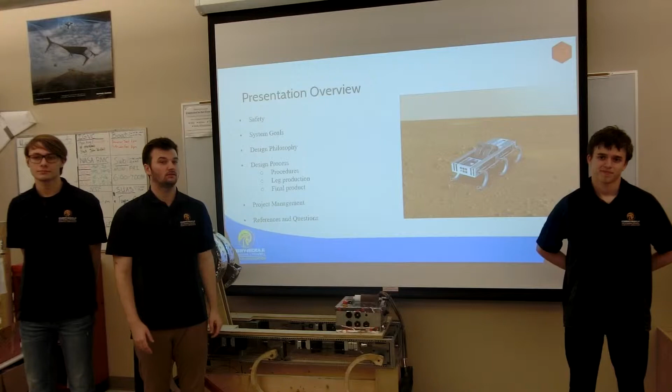My name is Zachary Marion, and I'm this year's team lead at Embry-Riddle Aeronautical University. In this presentation, we'll go over the safety, the system goals, design philosophy, design process, and team management. I'm going to go ahead and start it off with next year's team lead.

Thank you, Zach. My name is Nathan Rose. I'm the team lead for this upcoming year. The first thing we're going to be addressing is safety.

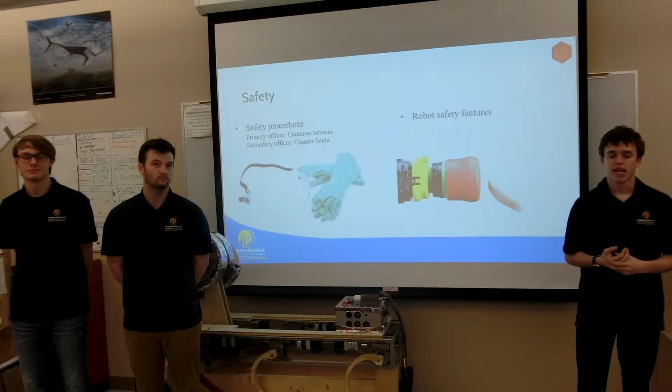We have two safety officers, Connor Scala and Cameron Severin, and during any test we require that two safety personnel be present: one that will watch the robot and one that watches everyone around to make sure that no one goes near the robot during a test.

Before a test is announced, we announce it to everyone in the room, and then we post signs in the area. That way everyone walking into the area will know that a test is in progress.

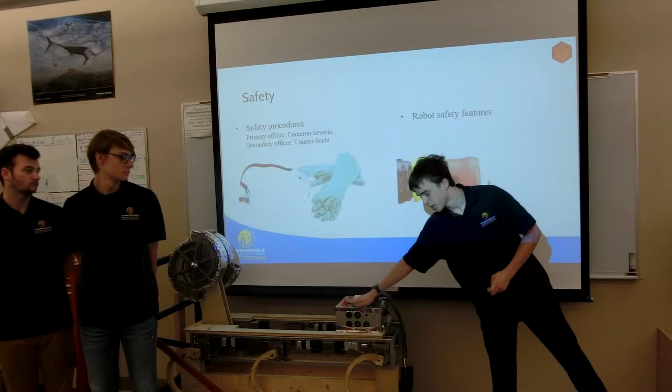Safety officers are in charge during a test, and everyone is required to listen to them. In addition, the safety officers are also in charge of the e-stop, and it is on top of our robot to help minimize injury during a test.

We also require that safety glasses are worn at all times during tests, and now I'm going to introduce the mechanical lead for next year.

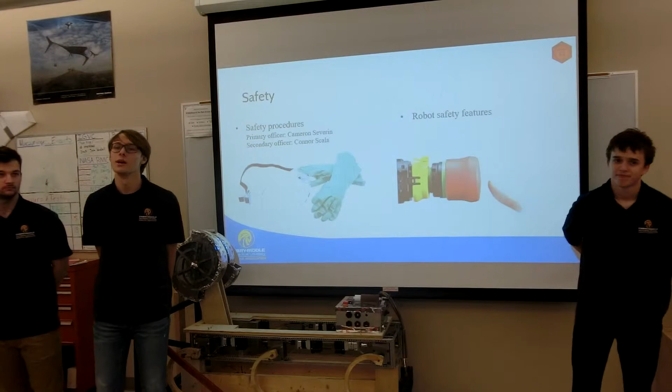Thank you, Nathan. My name is Roman Morozov, and I'm the upcoming mechanical lead. With our new Rex design, the goals of the system are to traverse through the obstacle field, mine in the designated zone, and return back to the depositing zone.

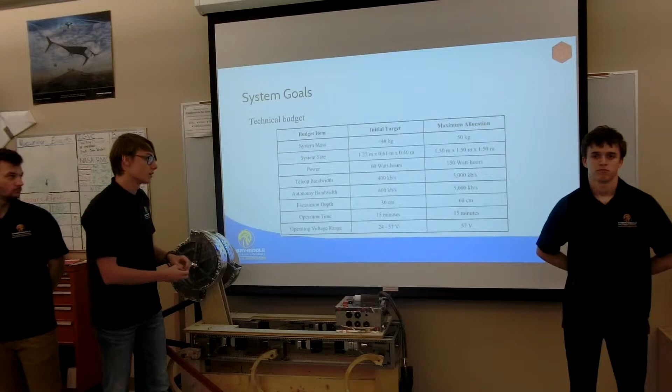We were allocated 50 kilograms for our whole system mass, but we are aiming to go under 40 kilograms. We were provided a certain volume; however, our final design for the robot is 1.25 meters by 0.61 and 0.4 meters.

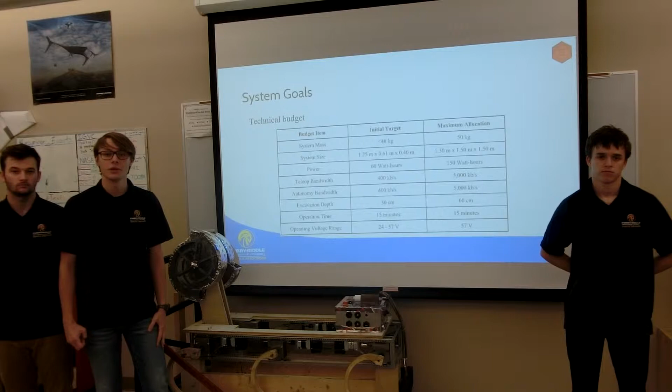Other items that we aimed for include 60 watt-hours of power, 400 kilobits per second of bandwidth, and an operating voltage range of 24 to 57 volts.

Our goals were improving from last year by minimizing the increase in mass of the whole system, implementing passive sifting, and designing the system for full autonomy.

Our robot must be safe, because safety is our number one priority. The system must mine at least 5 kilograms in the 10 minute run that was provided to us.

The robot must fit within the volume that is mentioned on the slide. The system must be dust resistant, robust, reliable, and capable of teleoperations and autonomy.

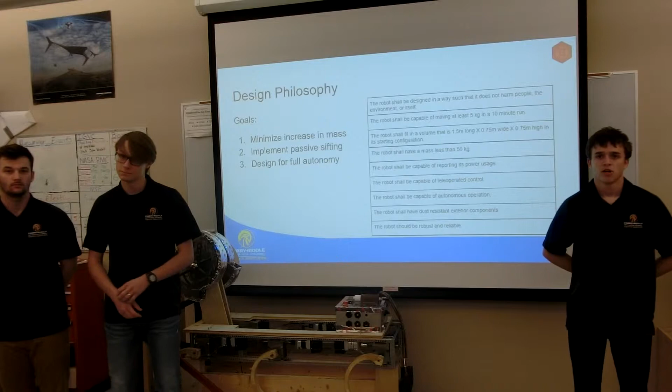So we split our team into 3 sub-teams this year: a mechanical sub-team, an electrical sub-team, and a software sub-team. Each of these sub-teams had a sub-team lead who reported to the team lead, and all decisions that were made by any sub-team had to be approved by the team lead and the faculty advisors.

We also split our robot into 5 subsystems: a drivetrain subsystem, sensor suite, chassis, electrical box, and excavation. We put members from the different sub-teams into different subsystems, that way we could maximize the flexibility while maintaining our team structure and maintaining individual responsibilities.

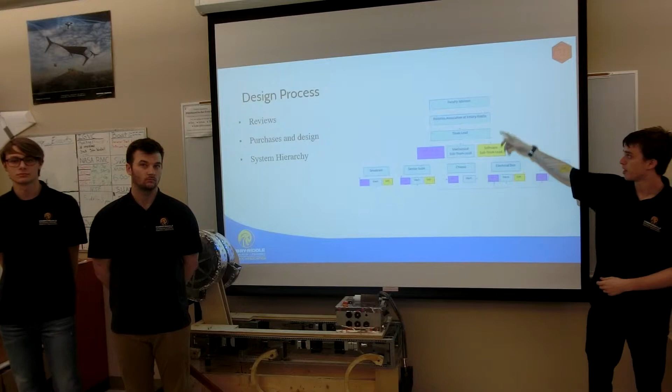In addition, if we ever had issues, we could talk to the Robotics Association at Embry-Riddle, because there are several other teams at our school that are also robotics competition teams that have similar design philosophies and software.

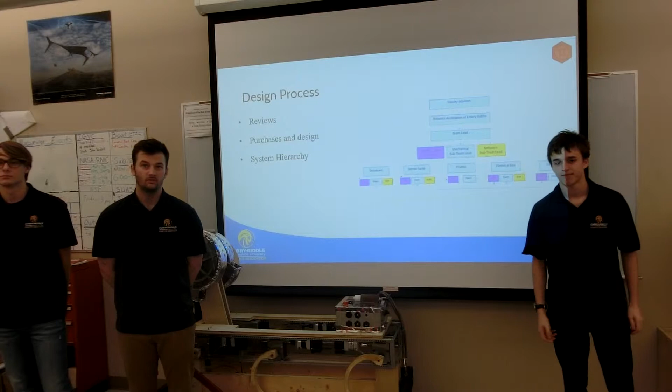This year, we implemented a legged design by trying to maximize our reliability of traversing the field to get over the craters and across the boulders.

We actually used a prototype leg made out of cedar wood, and we wrapped it in fiberglass to increase the durability. The software plan, whenever we started the process this year, was to have 3 points of contact at all times so that we maximize the stability of our system.

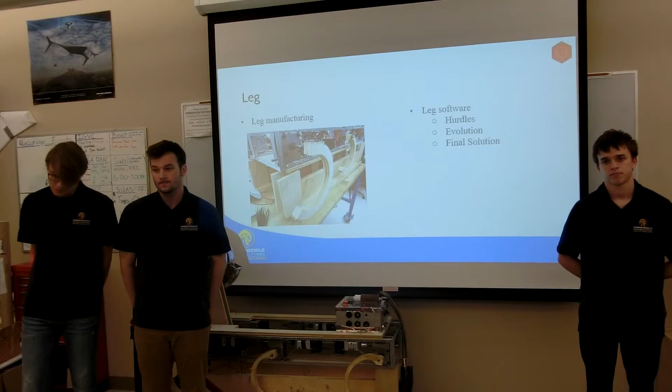The final product of our system was a fully functioning robot with some prototype parts.

The final design includes an excavator, which consists of one arm and two drums. This excavator system is on the inside of the robot compared to the outside, which we had on last year's.

The arm is being powered by a gearbox motor system rather than a linear actuator that we used last year. And another gearbox motor system would be powering the belt that goes inside the arm that will rotate the drums.

When the drums rotate counterclockwise, they dig. When they turn clockwise, they deposit. Right now the arm is positioned in the depositing position, and when we're digging, it would be lowered down. We switched the orientation of the drums from last year in order to maximize our range of depositing.

We had some trouble with torque rating of our motors and structure of the chassis. In order to overcome the chassis structure problems, we added this board during our tests. What happened was our chassis was long and narrow, which created torsion whenever we were running tests of our legs. This board minimized that torsion.

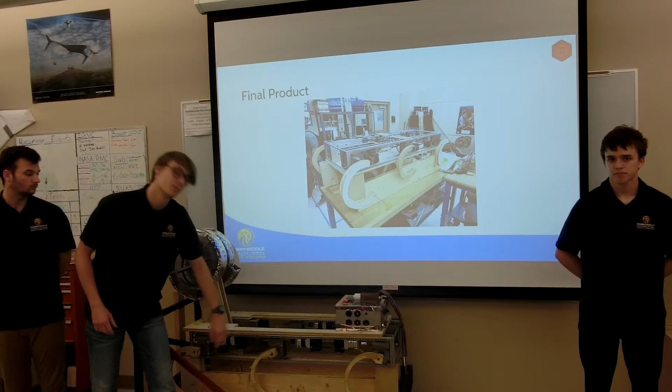For our final design, we designed extra structural support for the chassis. And in order to overcome the torque issue with the motors on our legs, we added extra gearboxes to each of the legs. In addition to the gearboxes, we also implemented a couple of software fixes that would temporarily help us solve the torque problem.

So what we did is we had all six of the motors lift up the robot and lean as far forward as they can, and then we would flip pairs of motors at a time. That way we would always maintain four motors on the ground, and when we were lifting the robot, we would have six motors in contact. These engineering solutions allowed our robot to traverse and mine efficiently.

Currently, we're working on next year's design. While having all of this year's success and failures in mind, we want to redesign the chassis so that we would not need to add extra support.

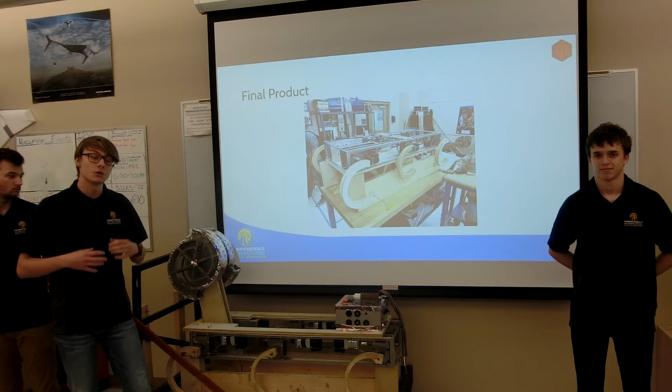In addition, we want to create a deployable system in order to use the time provided to us more efficiently.

So we used some management techniques such as a Gantt chart to help us keep our deadlines all squared away. We have several review presentations throughout the year: the systems integration review, operational readiness review, and critical event readiness review.

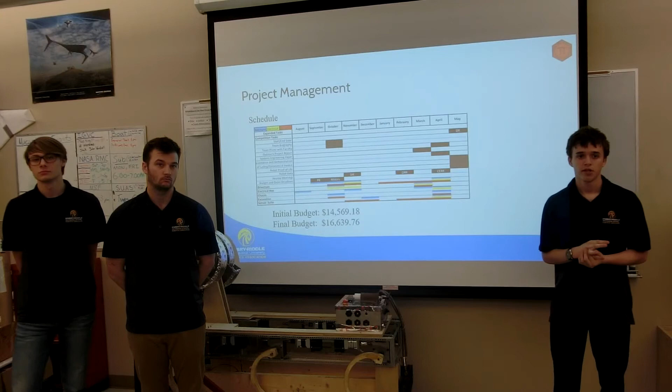These reviews were performed this year in addition to last year because the idea for this system was begun last year and continued into this year. During these reviews, all members were invited, and we explained the state of the robot and accepted advice from anyone who was present. We also prioritized the drivetrain subsystem this year over other subsystems due to the fact that the drivetrain is a new experimental system, unlike our excavation system, which was used in previous years.

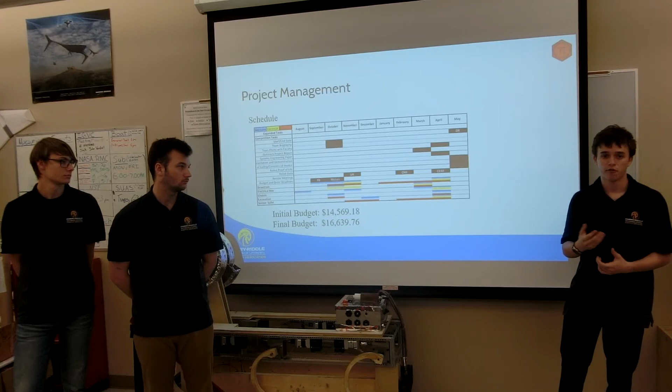Our budget this year was $14,500, and we went over by about $2,000 due to unforeseen circumstances such as our motors having torque issues and our frame having structural issues.

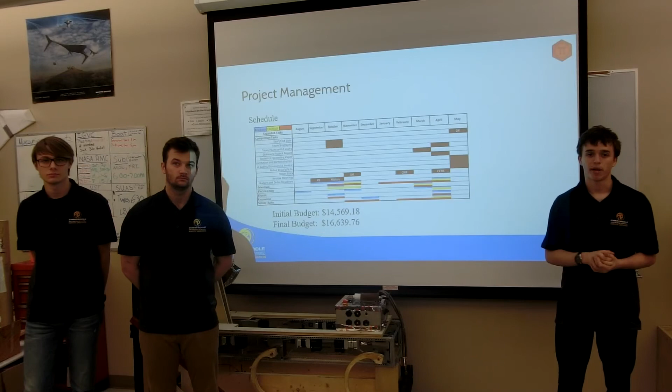But we ended this year with a fully functional robot, and we learned many issues that we can apply for next year.